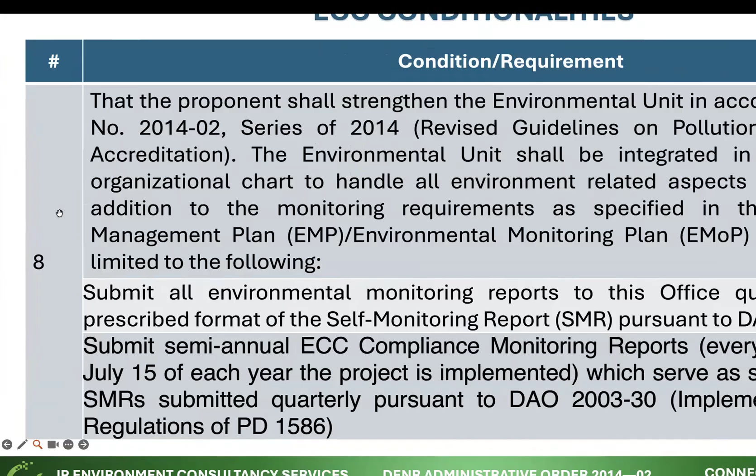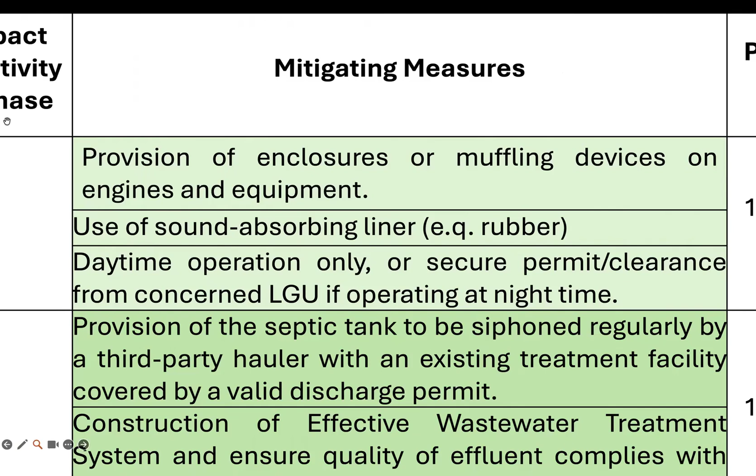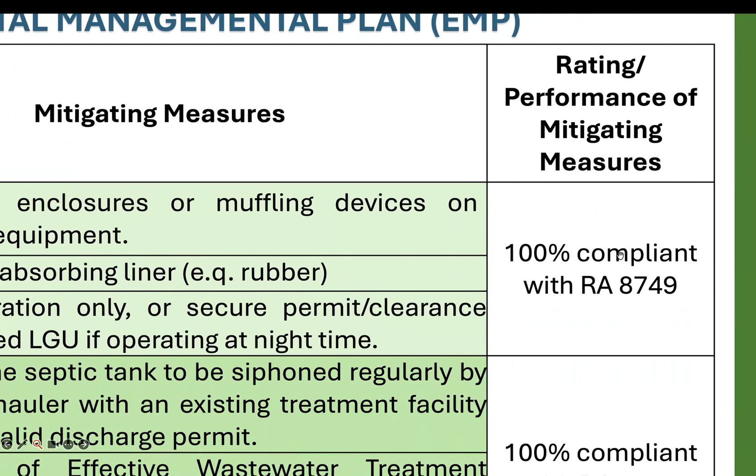The use of sound absorbing liner, for example rubber, and daytime operation only, or secure permit or clearance from the concerned LGU if operating at night time. So when we have an activity like generation of noise from equipment, we must have a mitigating measure, and our rating should be 100% compliant with Republic Act 8749. So that's one activity, applicable, and with a mitigating measure.

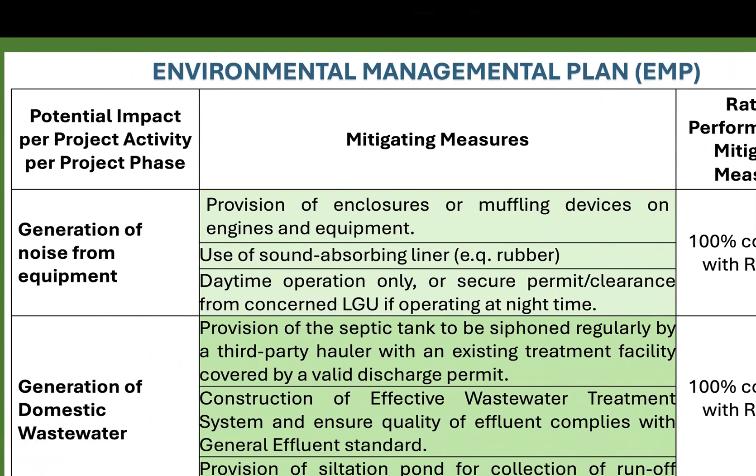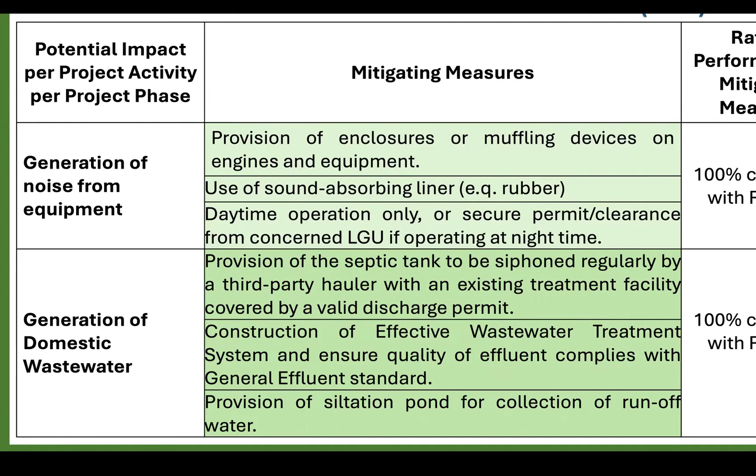For example, we also have generation of domestic wastewater. What is our mitigating measure? Provision of a septic tank to be siphoned regularly by a third-party hauler with an existing treatment facility covered by a valid discharge permit. We can also do construction of an effective wastewater treatment system and ensure quality of effluent complies with general effluent standard, or provision of a siltation pond for collection of runoff water. And our rating or performance of mitigating measure should be 100% compliant with Republic Act 9275.

So this is a sample presentation of the Environmental Management Plan or EMP. You can expand that, you can make the activities very specific to fit what the evaluator requires when applying for relevant permits or certification, for example for ECC or permit to operate.

There's always something about air, water, and also solid waste included. So our activity could be generation of solid waste, and our mitigating measures would be provision of a materials recovery facility, hauling of domestic solid waste by the LGU or a third-party hauler with permit or clearance from the LGU for proper disposal. And our rating or performance of mitigating measures is 100% compliant with RA 9003.

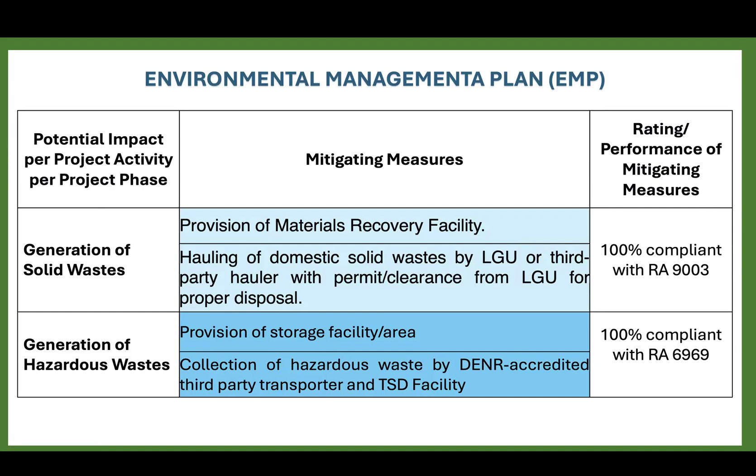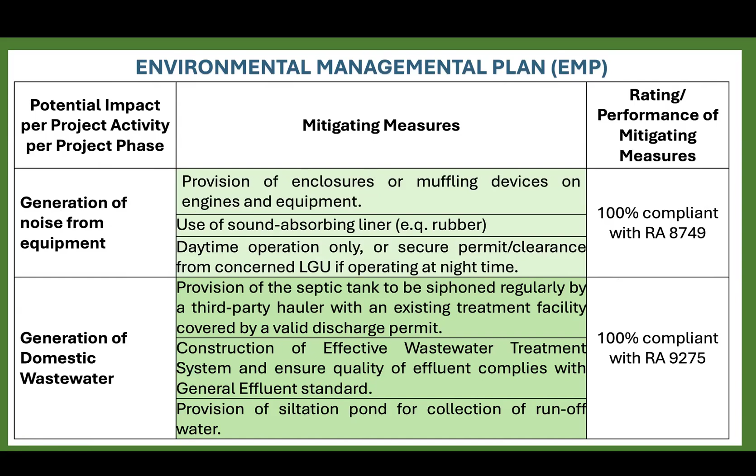So that's the presentation of the Environmental Management Plan. If you want, add specific activities, specific operations that you've identified, add a mitigating measure, and that's it. That's your environmental management plan.